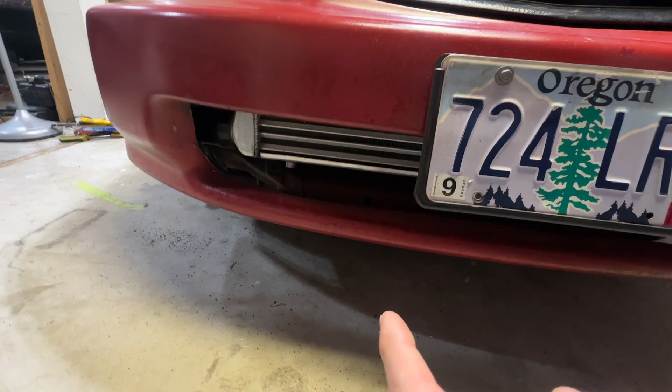Getting the drain bung drilled in the oil pan, stuff like that.

Today what I want to do is get the transmission swapped in this thing. When I first put the engine back together and got this thing up and running, I had it going with a VTEC transmission. The transmission that came with the car, which is a non-VTEC car, had a bad input shaft bearing, so while I was waiting on parts for that, I wanted to be able to drive this car around.

So I found a transmission for a VTEC D-Series engine and swapped that in here. There's no real differences between the transmissions other than the gearing. However, I wanted to feel the difference between the two, so I swapped back to the original non-VTEC transmission that was in the car. And let me tell you, it feels a lot slower.

So what I want to do today is switch back to the VTEC transmission, because based off the old butt dyno, the gearing in that transmission makes it feel a lot quicker. We're going to swap transmissions back, but before we do that, I want to do a couple of test runs so we can see some real numbers that show the difference between these two transmissions.

I'm going to do a couple 5 mile an hour to 60 mile an hour runs. I'm not going to do 0 to 60 because I want to rule out the launch. Then I want to do a couple 20 to 60 mile an hour pulls in second gear. We'll see what we get on the non-VTEC transmission, swap it over and show you how to do that, and then see what the numbers are on the VTEC transmission. I have a feeling we're going to be quite a bit faster just from the transmission swap. So let's do that.

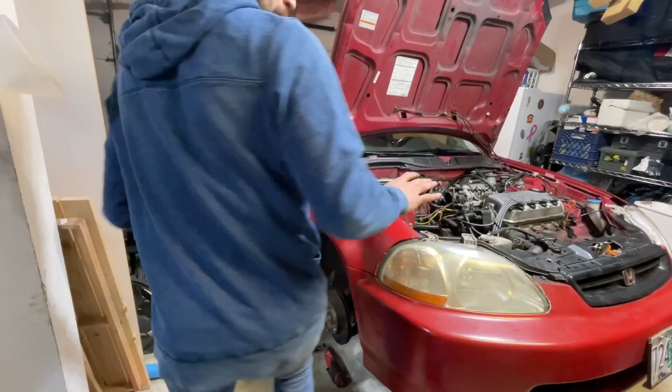We're getting started pulling this transmission out. So far, all we've done is taken the tires off, the brake caliper and caliper bracket, and I'm getting the tie rod and upper ball joints out of the way so I can pop the axles out of the transmission. From there it'll be pretty much smooth sailing, just pulling bolts out and dropping this transmission out.

Okay, now we'll pop off the axle nut. It's going to be 1.25 inches.

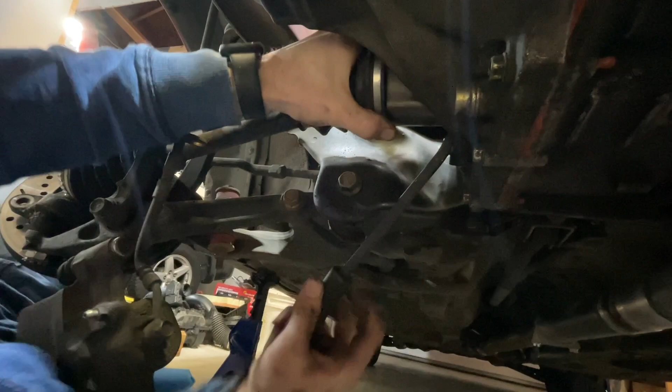Alrighty, now I can climb under here, take my handy dandy pry bar, and just pop these axles out. Sometimes it can be easier said than done. Let me show you what I'm prying on so you don't pry on the wrong spot, because these are kind of finicky. I just got my tip in between there, and I'm prying against the case here. Then I like to rotate it. There we go, that's usually what it is - pry both sides opposite.

Cool, both axles are out now. Now I'll remove this inspection window, and then we're pretty much clear to start pulling this transmission out. It's going to be the two motor mount or transmission mount bolts up top, and then the one in the back, and then we have just the bell housing bolts, and that's it. Oh, and then also the shift linkage - I'll do that real quick right now.

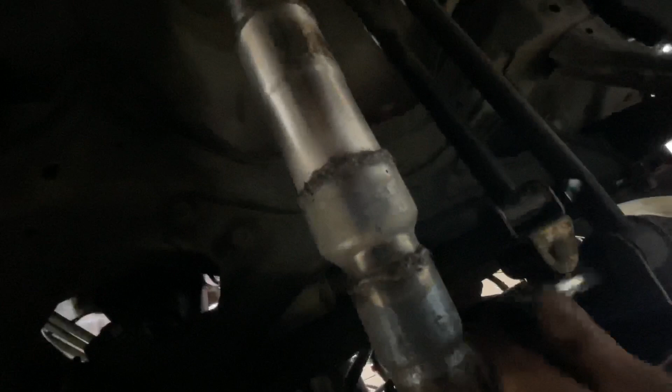Okay, I just pulled the clutch slave cylinder off right here, and then I disconnected a couple of the connectors, like the reverse sensor and the speed sensor. Those are the only two connectors attached to this transmission. My brother's working on the inspection window. Then we'll get a jack underneath this thing and make sure the engine is supported, and then we can start taking the bell housing and motor mount bolts out. Need to make sure the engine's supported because there's only one motor mount on that side that's going to be left holding it in, so we just want to have something underneath the engine keeping it held up.

Forgot to disconnect the battery. I mean, what did you disconnect to make it spark like that? Oh, I just arced the ground - arced it on the starter lug.

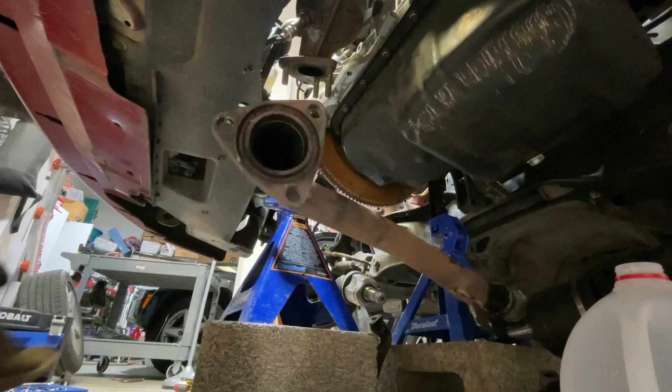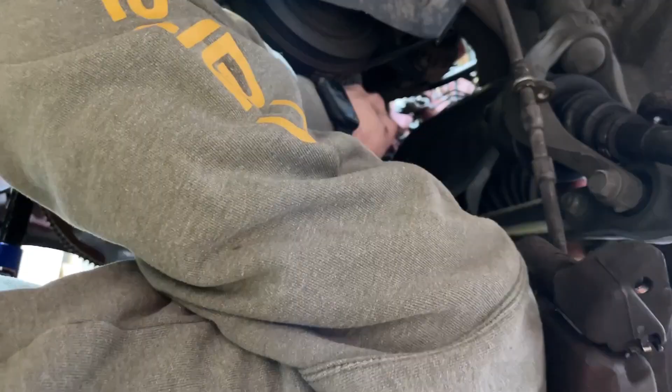Hell yeah, brother, oil pan off. Fantastic, that is fantastic. Let's feel some of these.

So check this out - we definitely have some side-to-side play, which makes quite a bit of noise. I mean, all of them have a lot of side-to-side play, which is pretty noisy. But when I try to hold it up to one side so it can't wiggle side to side at all, and then wiggle it up and down, like in the knock direction, it doesn't do it. But I mean, that's freaking pretty damn noisy.

I mean, I don't see a ton of glitter in there or anything.

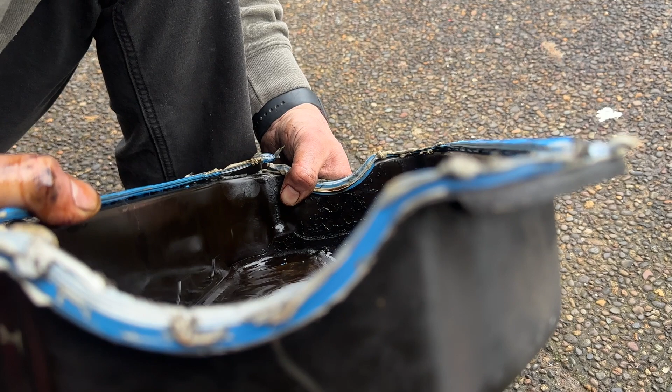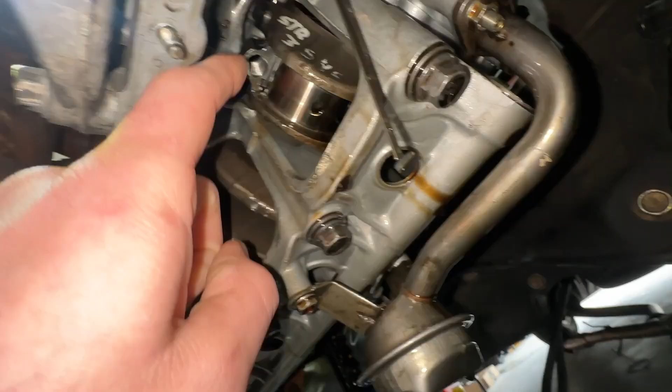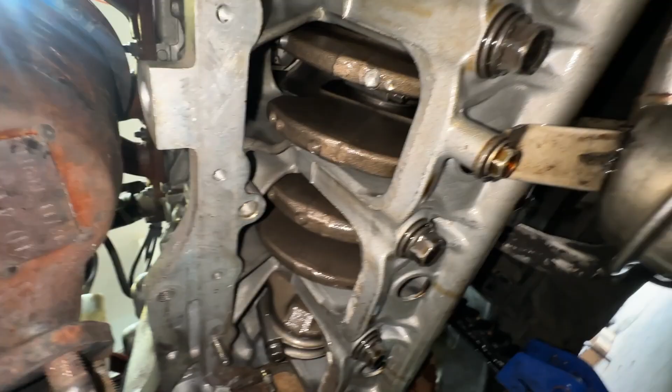So I pulled the rod cap off on this cylinder right here. Crankshaft looks good under there. I'll show you guys the other side in just a second. But I wanted to check and make sure all these look good because of that knock noise I'm getting. Initially, I saw that they all have quite a bit of side-to-side play, and that kind of freaked me out a little bit, as well as the crankshaft - I can move the whole crankshaft back and forth just slightly. So I called my boys up at D&D Machine and asked them what they think about that. They said the side-to-side play is totally normal, you need to have that. But I don't know, everything looks good so far, so I don't know where this knock noise is coming from. But thankfully, so far it does not seem like it's coming from the rotating assembly.

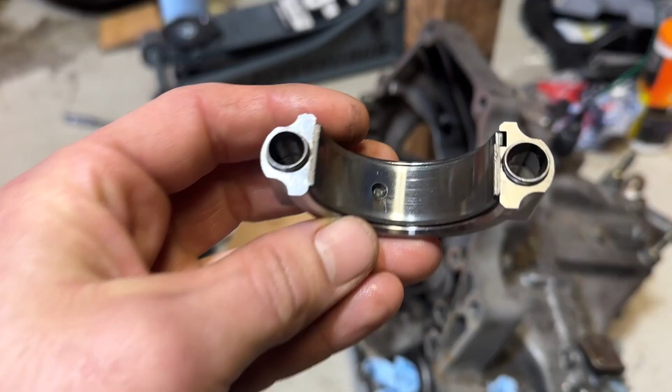So here's that cap I was talking about. Those little light scratches are literally just from my fingernail - look, I can scratch it up a little bit. You see that little scratch right there? So they're more scuffs really than scratches. But anyway, this rod cap and bearing look totally fine. I see nothing on that really concerns me, so I pulled off the rest of them. They all pretty much look like this, so I'm going to just go ahead and put these back on and run them, and we'll search for that knock sound somewhere else. I'm going to say it's not the rod bearings. So we'll put these back on, torque it to 55 pounds, and then we're good to go.

We'll drill our hole in our oil pan. Okay, so from what I can tell, it looks like the safest place to position that bung is going to be right here, in between these two bolt holes. So I'll just try to line it up in between this stud hole and this bolt hole right here, so it ends up poking out right at this part of the girdle and doesn't hit any part of the crankshaft.

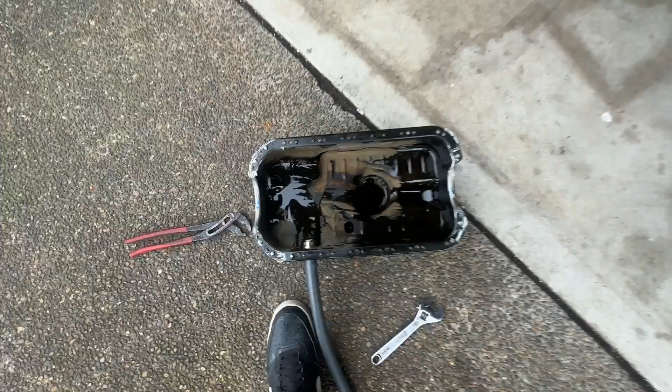All right, that looks pretty good. She's nice and tight, not going to leak probably. So I'll scrape this old gasket material off this oil pan and we'll get her back in there.

So here you go. The way you can tell these two transmission parts apart - the VTEC transmissions will always have a stamp right there with a B000. See the B000 right there? Whereas the non-VTECs, this one's a little dirty so you might have to take my word for it, will have A000. You can see right there, there's an upside down A, and that's the only difference. This one also says K4F on the sticker, whereas this one says E5F, but I don't know if that's a consistent thing between all the VTEC versus non-VTECs. The B000 is always going to be the VTEC transmission, so look out for that.

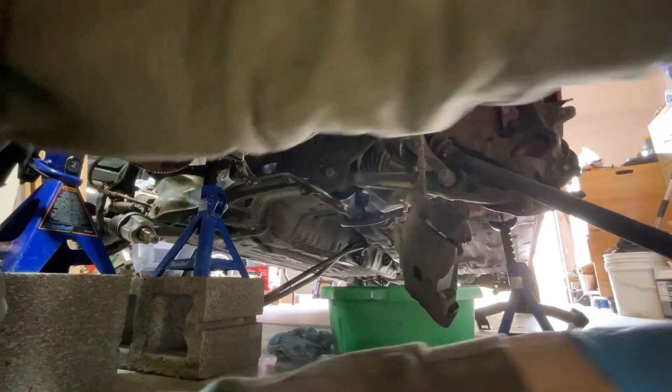And we'll fish it up in there. Actually, I'm going to make sure real quick that there's no little bits of debris in this oil pan.

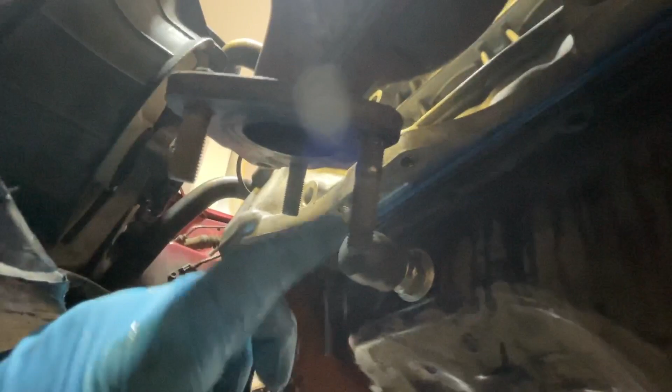All right, so one thing I failed to consider is the fact that the drain plug is going to be pointing right at the flange right here. This probably won't matter when we get the turbo on here because it's going to dump in a different spot, but as of right now this thing is just right in the way. So we'll just put a cap on there for now - it needs to have a cap on there anyway until we get the turbo all plumbed up. But let's get these bolts for this oil pan nice and tight.

Since all those rod bearings looked okay, I called my boys down at D&D and asked for their advice to see what they think. They were saying that since I have good oil pressure the whole time, there's no way I could have a bad bearing - if I had a bad bearing, it would drop the oil pressure. Since I always have good oil pressure when it happens, they were leaning more towards that it might be detonation, which I guess I could believe. It's a pretty low compression engine, but it could be detonating. Why not? So they asked me if I have a decent timing light.

I said no, because the truth is I don't - I have a terrible timing light, just the cheapest one I could find. And they told me to come down. Big shout out to my boys at D&D Machine, because they told me to come down and use their timing light. They have a nice one, and they did not have to do that - they told me to come down and use it for free. I very much appreciate that.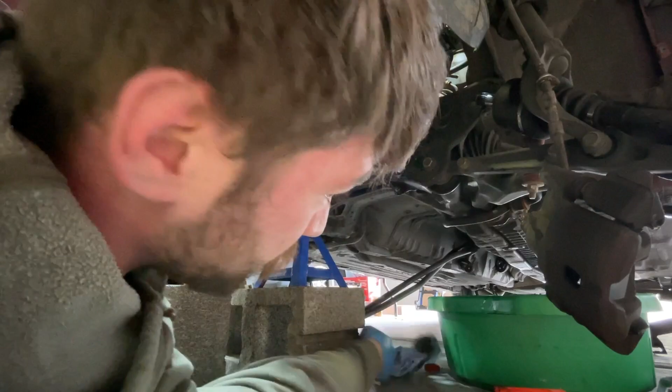These don't need to be crazy tight, just tight enough to where it doesn't leak. You see I'm not holding the end of the wrench right here because I can get a lot more leverage on the wrench like that. Just kind of holding it in the middle there, so it kind of reduces my leverage and dials in my torque rating there.

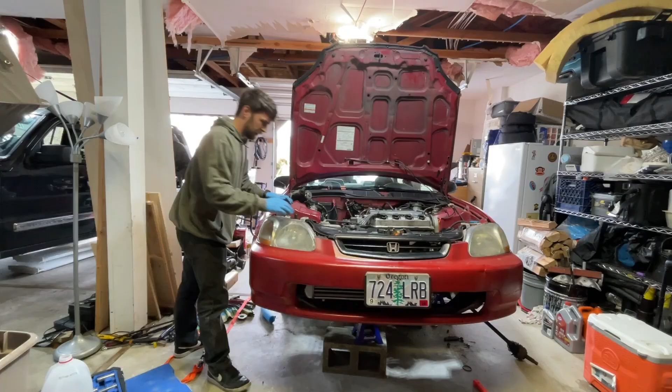Alright, we got everything prepped and ready to go here. Just gonna get this transmission set back into place. No big deal - no big deal, I'm kind of a G. Should have dropped that on your toes. It's recording, alright.

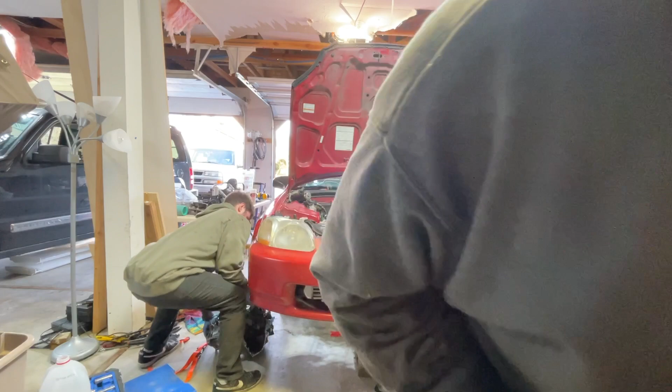Grab on. Okay, you're good, step it out. Ow.

Do you want me to hit your calipers too while I'm here? There's a little grease fitting on your calipers too, you want me to hit it while I'm here? That's the bleeder nut for the... oh, I'm stupid.

Now the question is going to be, do I have enough transmission fluid to fill this thing up? New transmission's all hooked up and installed. Let's go see what this thing can do.

All right, there, we'll just hold it at 15. I don't know, man, that transmission definitely feels faster. All right, this ain't perfectly flat, but you know what, it's flat enough. We'll hold it at 10 miles an hour here, and then we'll take off.

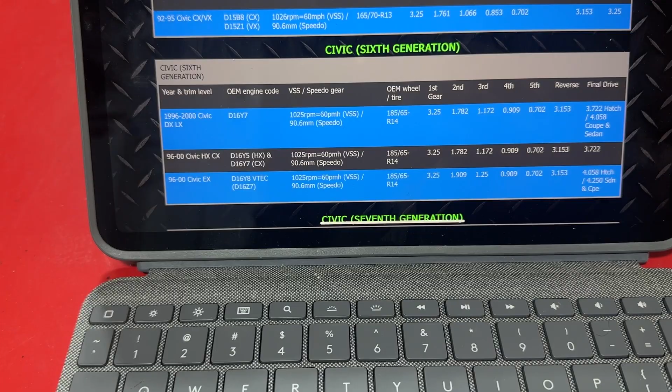Guys, I just wanted to show you this from inthefastlane.com. You can see here, these are tables that show the gearing for the 5th and 6th generation Honda Civic transmissions. So you can actually see what the real gearing is for the transmission we're talking about today.

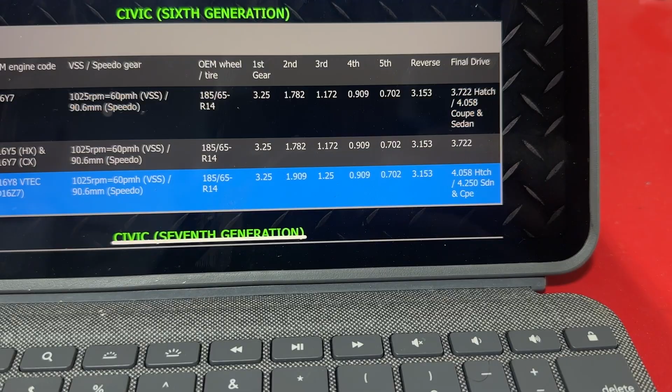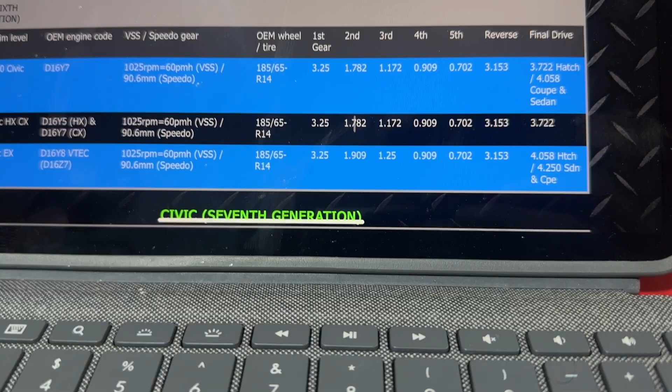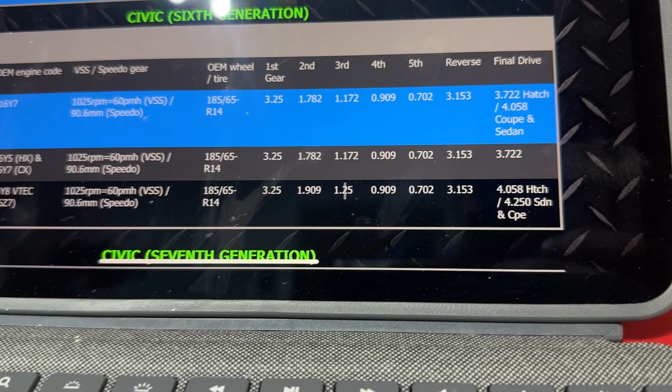This is the VTEC transmission that we swapped into the car, and this is the non-VTEC transmission that was in there already. If you look at 1st through 3rd gear, you can see a big difference in the gearing. 1st gear is 3.25 on all of them. 2nd gear on the original transmission was 1.782, whereas 2nd gear on the VTEC transmission is 1.909. Then 3rd gear is 1.172 versus 1.25. Once we get into 4th and 5th gear, they're both the same, at 0.909 and 0.702.

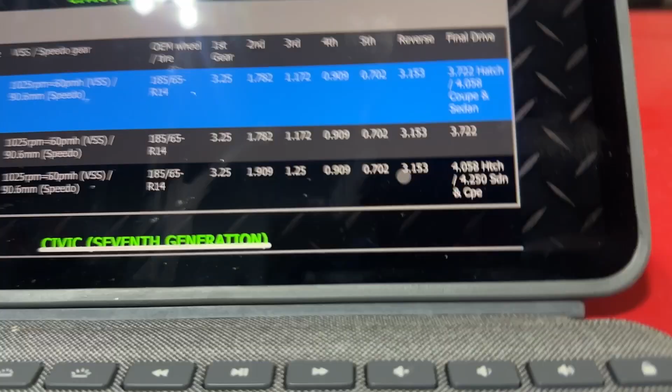The final drive ratio is also different on both of them. For the coupe, which is what we have, it's 4.058, whereas on the VTEC transmission it's 4.25 for the final drive ratio. So there you go, those are the actual differences between the transmissions. If you're trying to decide on one or the other, that information is right there at inthefastlane.com for the 5th and 6th generation.

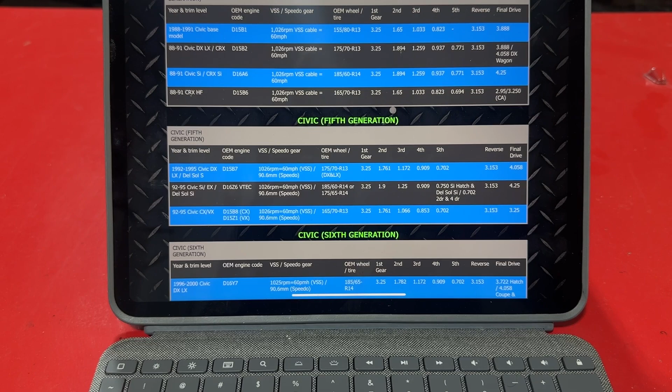It's got all the D-series transmissions listed out here, but not all of these are interchangeable. 5th and 6th generation will swap over, but you can't put a 7th generation on a 6th generation Honda.

Alrighty folks, so I crunched the numbers and I have the results here, as you can see. But first, real quick, I want to mention a couple things. First, at the beginning I said I was going to do like 5 or 10 mile an hour to 60 mile an hour pulls.

While I was doing the editing, I realized it'd be a lot easier and more consistent to start the timer at 20 miles an hour and stop the timer at 55 miles an hour. So that's what you're gonna see in the video.

One thing that might look a little weird when you're watching the video back is that the timer only goes to 60 milliseconds before it clicks over to the next second. That's because of the way the software works - I filmed this video at 60 frames per second, so it only has 60 frames to count before it can switch over to the next second. It looks kind of funky, but it's easy enough to do the math, and that's what these times are - they're converted over.

That's why these times might look a little bit different than what you see in the video. Secondly, I'm obviously not a professional driver, so there's a lot of room for error in my shifts and my launches. So take all these times with a grain of salt, I'm not a pro.

It's important to note that the VTEC transmission does not reach 60 miles an hour in second gear. The non-VTEC transmission gets to about 64, 65 miles an hour in second gear, that's where it tops out. The VTEC transmission takes one more shift, you have to be in third gear in order to hit 60 miles an hour.

So that's why I decided to cut the test stop at 55 miles an hour in the times, but I'll also give you the times all the way up to 60 miles an hour. I recorded that as well.

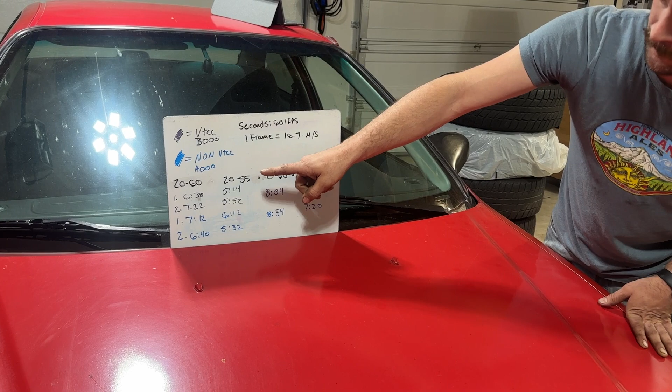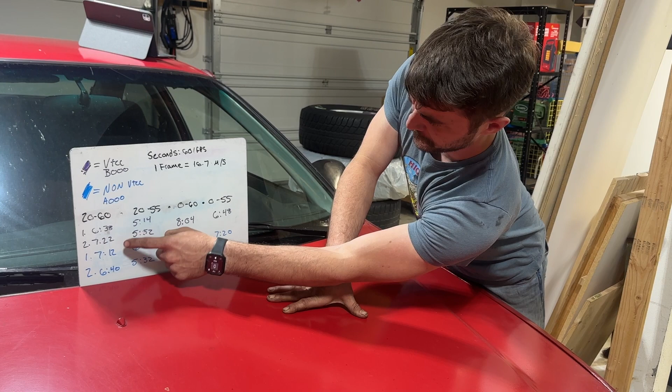Here's the results. 20 to 60, the VTEC times, or the B000 transmission, are all in purple, and the non-VTEC times are all in blue. So here we can see 20 to 60, first run to first run, we're almost a second faster with the VTEC transmission. On the second run, I believe we were going uphill, but we were a little bit slower, like 0.8 of a second slower, so quite a bit slower.

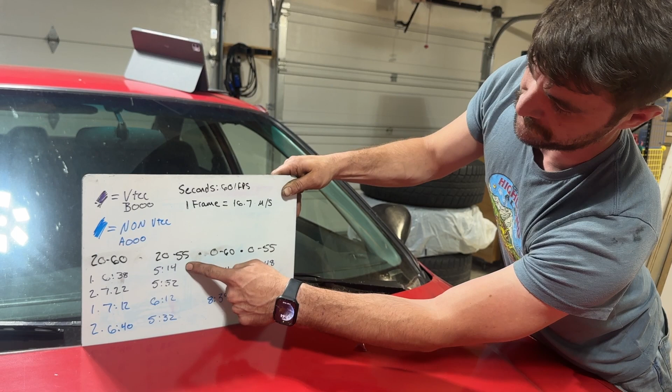Now this is that same run, but ending the timer at 55 miles an hour. You can see here the results are pretty much the same, but we're about a second faster to 55. If you exclude that shift, these two numbers are a lot closer, we're only 0.2 of a second slower when you get rid of that shift. Again, we were going uphill on the second run in the VTEC transmission.

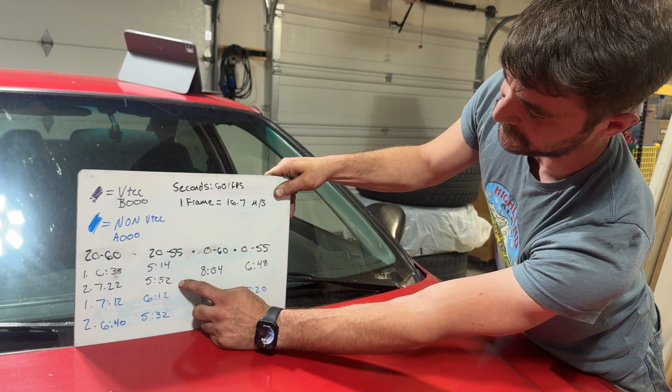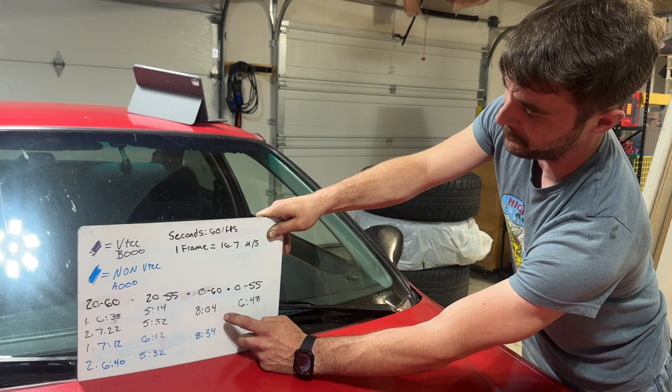The 0 to 60 times, I just did one of those, so it's not really great. However, we could see that we were in fact faster, even with an additional shift, on the VTEC transmission. And again, from 0 to 55, when you get rid of that shift, we were a whole lot faster on the VTEC transmission.

So in conclusion, what do I think? If you can shift pretty quick and you're a good driver, or even a relatively good driver, good at shifting and launching, you can definitely get better times in the VTEC transmission. The gearing in the VTEC, or the B000 transmission, makes it feel a lot torquier.

The whole goal of that transmission is to keep the car in VTEC. You start off in first gear, hit VTEC, ring it all the way out, then shift to second gear, drop down, and you're still in a high enough RPM range to stay in VTEC. So you never drop out of VTEC and then have to hit it again. Whereas the non-VTEC transmission is only set up for fuel economy, the main goal is to keep you at the lowest RPM for any given speed. So it makes sense that the VTEC transmission is a lot quicker.

I think in the real world, the VTEC transmission is probably gonna end up being faster, because almost all manual transmission cars are gonna have to shift right either just before or just after 60 miles an hour. So we will have already shifted gears and already be back in VTEC by the time the people who have to shift after 60 miles an hour have started their shift. So I think in the real world, the VTEC transmission would probably be a little bit quicker, but that's just my personal opinion, and that's what I think from the data I was able to get.